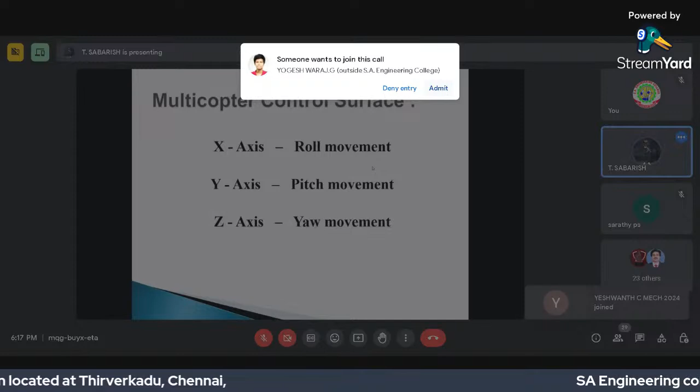Now we are coming to the multi-copter section. Multi-copter surface controls are x-axis which controls the roll movement, y-axis which controls the pitch movement, and z-axis which controls the yaw movement, similar to the UAV.

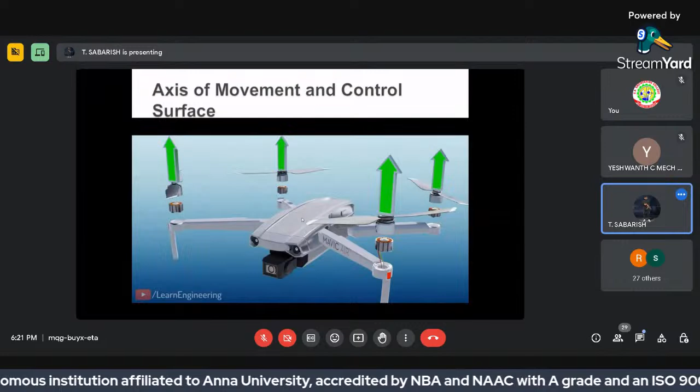Learn about the other two angular motions of the drone: pitch and roll. The pitch and roll of a drone are controlled by the same stick, and they work based on the same physics. To pitch the drone forward, the front propellers are spun at a lower speed and the back propellers at a higher speed. This creates a different lift force at the front and back, producing a net torque that causes the drone to pitch.

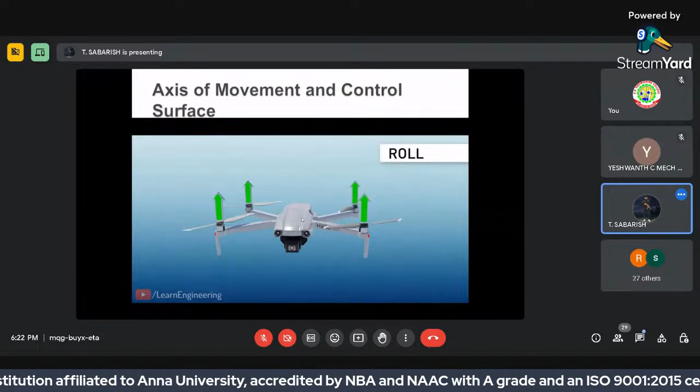To roll the drone, the same trick is applied but to the side pairs. One side pair is spun faster and the other slower, and the net torque forces the drone into a roll motion. Interestingly, in both roll and pitch operations, even though you change propeller speeds, the reaction torques produced by the motors add up to zero. This is the beauty of quadcopter drone design, making way for stable drone operation.

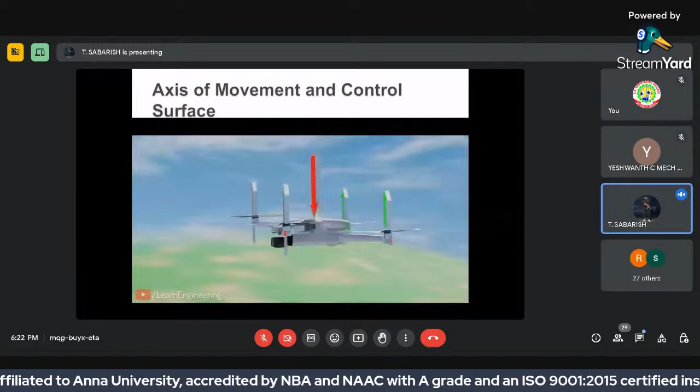Earlier in this video, we saw how to climb a drone. Now let's see how the drone is flown forward or sideward. Assume you are pitching the drone forward. After achieving the desired pitch angle, you bring the propeller speeds back to the same value so it won't pitch further. The question is whether the drone can balance at this tilted angle.

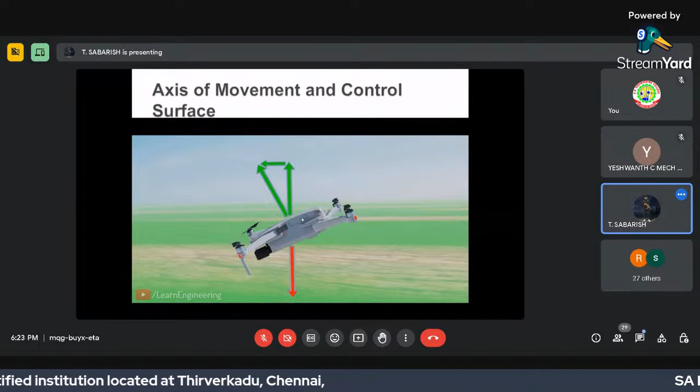The answer is no. To balance the drone, we must first balance the gravitational force. Suppose the propeller speed is such that the vertical component of the propeller force balances the weight. Here comes the issue: the propeller force also has a horizontal component. Even though vertical forces are balanced, the unbalanced horizontal force will move the drone horizontally, causing a drag force on the drone's body. The drone increases its speed horizontally until the drag force matches the horizontal force.

In short, to fly the drone forward, you just pitch it down and balance it vertically — the drone does the rest, automatically moving forward. To get side motion, the same physics is used: roll the drone towards one side and balance it vertically.

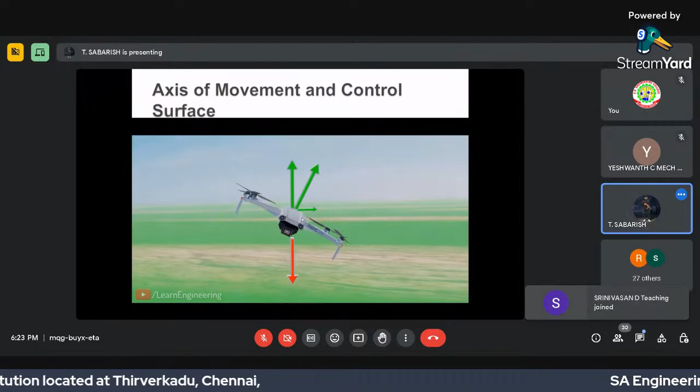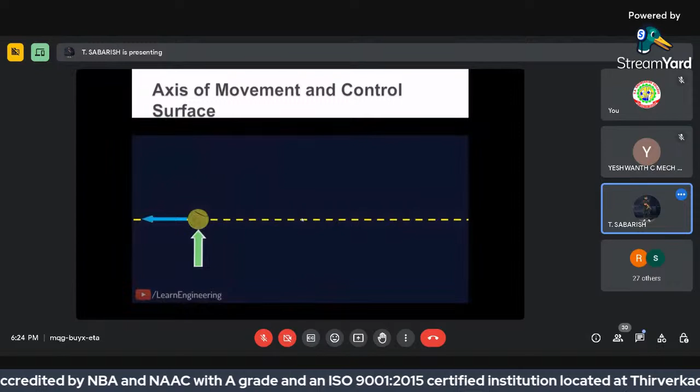So here's a question for you: is it possible to move the drone in a perfect circle? The secret lies in the physics of circular motion. Let's brush up on basic principles. Consider an object moving in a straight line — when acted on by a force that is always perpendicular to its velocity, the object will turn in a circle.

Now you have the answer in mind. For example, you can make the drone move straight by pitching it down. Now, if you roll the drone as well, you can easily produce a force perpendicular to the drone's velocity. This will make the drone turn in a circle.

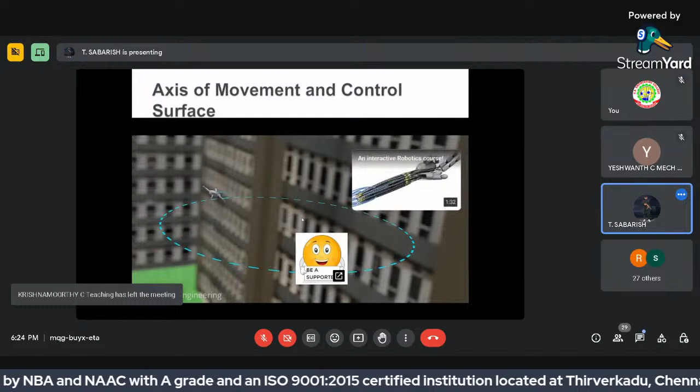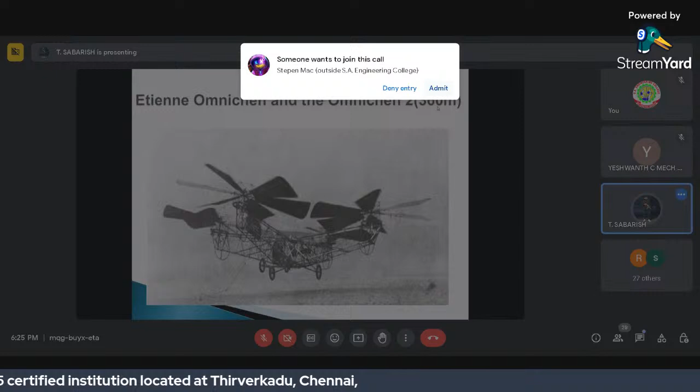Based on various principles, we came to understand how the drone works. There are a lot of differences between a drone and aircraft functions. Aircraft function due to a lift force caused opposite to the air, but in a drone, it produces a lift force to make it fly.

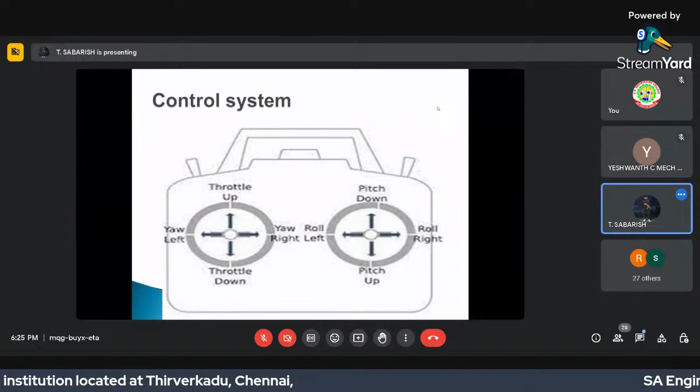This is the control system to control both the aircraft and the drone. We have shown the yaw, roll, pitch and throttle sections. On the left side, upward and downward motion shows throttle up and down, and horizontal motion shows yaw, left and right. On the right side, vertical motion shows pitch up and down, and horizontal motion shows roll, left and right.

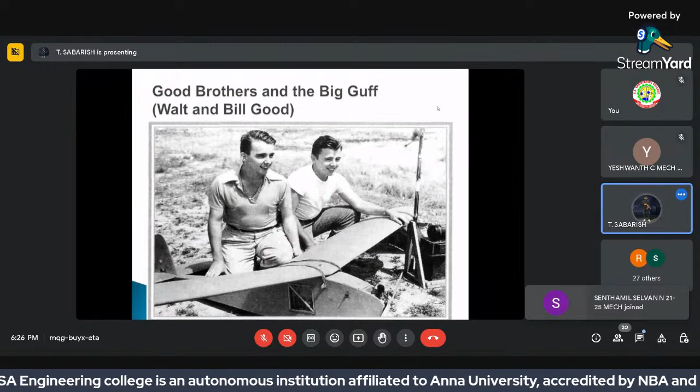These are the two people who created the world's first aerially controlled UAV. They are known as the Good Brothers, their names Walt Good and Bill Good. They created this aerial vehicle with the help of a Yagi antenna, carrying it along to the aircraft by landing from the ground with the help of another person to operate it.

Let's see some basic aerobatics for controlling an aircraft.

We talk about basic aerobatics and more advanced aerobatics for the quadcopter. We're going to start and get in the air. First we'll do a right or left roll, in this direction on the aileron stick. As we roll, we catch with both throttles — follow the roll, then catch with throttle. If I don't do that and keep rolling, it becomes wider, more linear with a lot of sideways action.

Once again: throttle, throttle, and throttle. To do a front flip or back flip is roughly the same thing — add throttle, push forward, and here we go. Add throttle, flip, add throttle. The flip order is pushing forward, letting the stick come back, catching it, flipping the cyclic stick, and adding throttle.

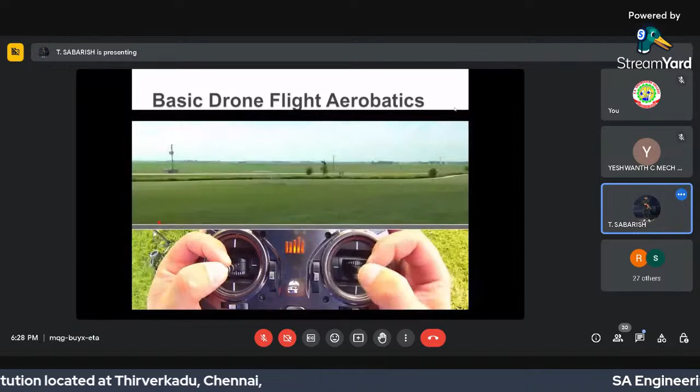Now let's do some advanced stuff and show how to do flips over to the side. Coming toward us, we do a power loop — it takes a bit to do. Add throttle, keep pulling back on the stick, travel over for power back down. We add throttle to gain speed, fall back, and come to the bottom.

That's kind of a short loop, but you can get the idea — that's how you do a basic flip. One more time: adding throttle, pulling over, stop. Now come back here to center.

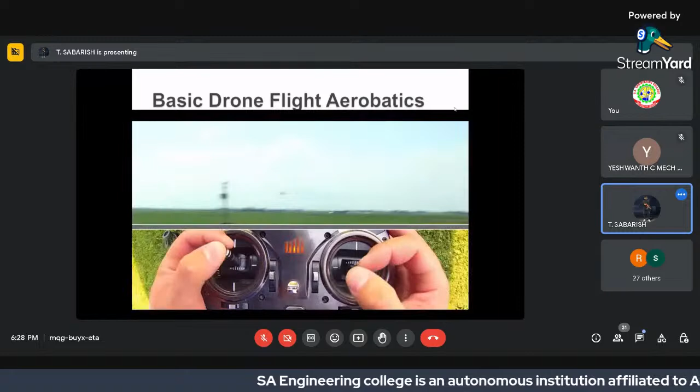Now we're going to string stuff together — fly out and have a good time with some real moves: wheels, right rolls, left flips, traversing flips, pirouetting stuff, far out here.

This is kind of real basic aerobatics — two stall turns, then a pirouette at the bottom. You can see what my hands are doing, just adding slight influence at a time, catching it with throttle. It's not a helicopter, so it doesn't float.

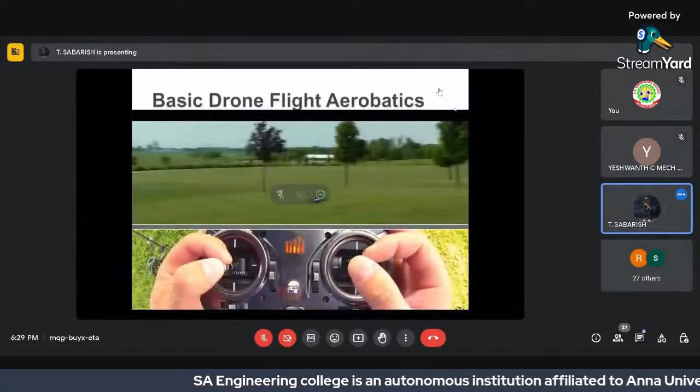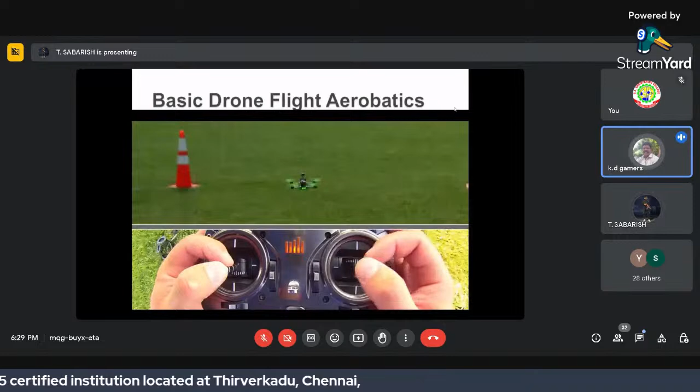These types of aircraft take a lot of practice to control. I'm just following the stick movements of the aircraft. It requires all four sticks — throttle, roll, pitch, and yaw — to control the aircraft simultaneously. Even missing a single stick can cause a crash, so we need all four sticks together, and for better performance we also need a gyroscope.

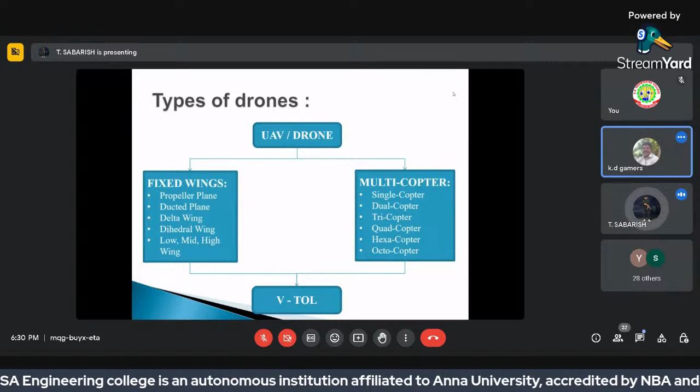Now we're moving to the next section: types of drones. UAV and drones are similar. There are two types: fixed wings and multicopters. In fixed wings we have propeller plane, ducted plane, delta wing, dihedral wing, low, mid, and high wings. In multicopters we have single copter, dual copter, tricopter, quadcopter, hexacopter, and octocopter. There's also VTOL, a hybrid version of fixed wing and multicopter.

Let's move to the first of these topics: fixed wing UAV and drone sections.

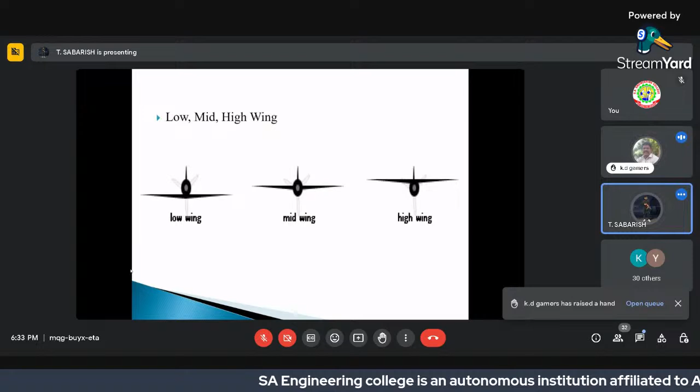These are the low, mid, and high wings - the three types of wings used in every type of aircraft we've seen before. Low wing type aircraft are mostly used in delta wing and racing type paraplanes. Mid wing type airplanes are used for commercial planes and cargo planes. High wing type aircraft are used like buggy planes, cargo planes, and even gliders.

Next we see about the multi-copter, UAV and drone section.

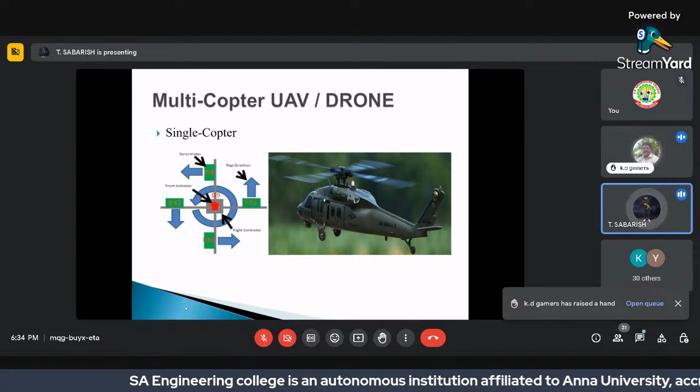The first one is single copter, which we all know as a helicopter. It's a single shaft rotation, but it also has a servo motor connector, based on whether the helicopter has two wings or four wings. If it has four wings, we have a four-control system of servo motors. If it has two wings, we'll have a two-control system of servo motors. While the aircraft propeller is rotating, it does not change any angle in the propeller, but while taking off, the servo motor changes a linear angle in the propeller for giving thrust, and for landing on the track.

The next thing is dual copter. As seen in the video of how the propeller orientation rotates, it is the concept of two wing motors, which we may have seen in a movie, rotating clockwise and counterclockwise. It has less efficiency and less power lifting capability, so these drones are not used commercially - it's just a concept, or maybe an RC model.

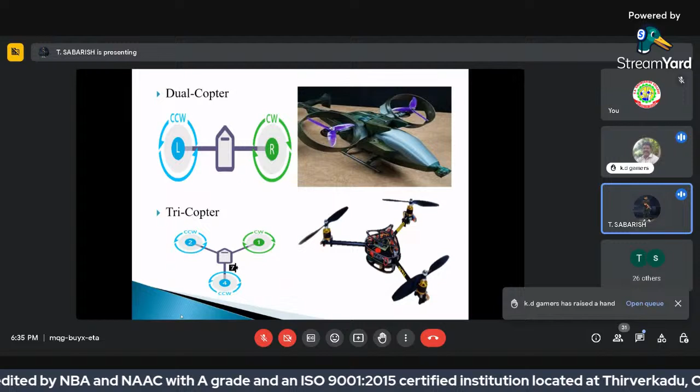And tricopters. Tricopters are exactly as the name implies - three blades in a Y direction. The left side corner and bottom corner rotate in a counterclockwise direction, and the right side rotates clockwise. The backward motor can either rotate clockwise or anti-clockwise, but it's attached with a servo motor, which functions exactly like a helicopter's tail rotor, changing left or right to turn the yaw direction of the drone.

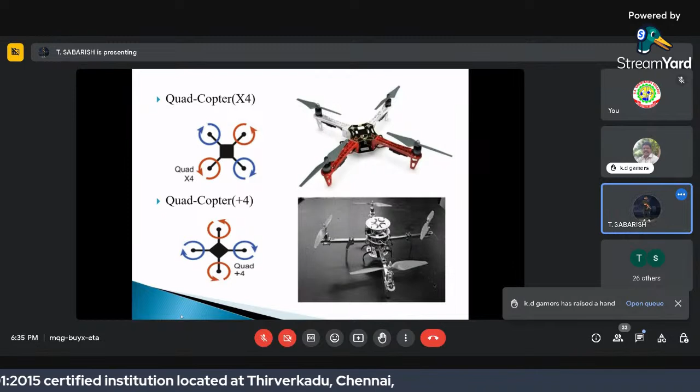Quadcopter has two types: X4 quadcopter type and plus 4 quadcopter type. X4 quadcopter is the most common type we've ever seen, forming an X direction with forward two motors and backward two motors. But in a plus type quadcopter, there's a single motor for forward, single motor for backward, single motor for left, and single for right. We can see the motor orientation in the left side diagram.

Next is the hexacopter. This also has two types: X hexacopter and Y6 hexacopter. Hexacopter has six motors, which acts as a basic drone model. Meanwhile, the Y6 hexacopter is an upgraded version of a tricopter with two motors - one on top and another upside down. The propeller will be faced clockwise and the downside motor will be anti-clockwise to create perfect thrust. These models are designed to be compact while producing more thrust and more lifting capacity.

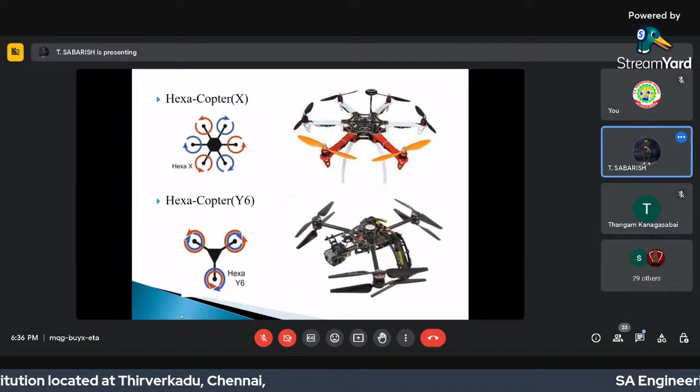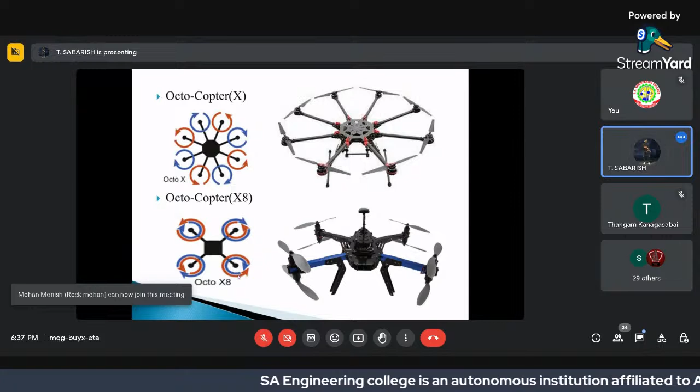The main reason for inventing this aircraft is that a quadcopter with 4 motors consumes more power for takeoff and traveling, while a single rotor aircraft consumes less power and covers a longer range. By combining this quadcopter and aircraft, it can travel more efficiently and take off vertically, so it doesn't need any runway. With the power of a vertical engine, it can travel a long distance to cover a long range.

The future applications of drones are aerial photography for journalism and films, shipping and delivery, and even space research. But for space research, we need a small modification, using either a jet engine or small gases which produce a little thrust.

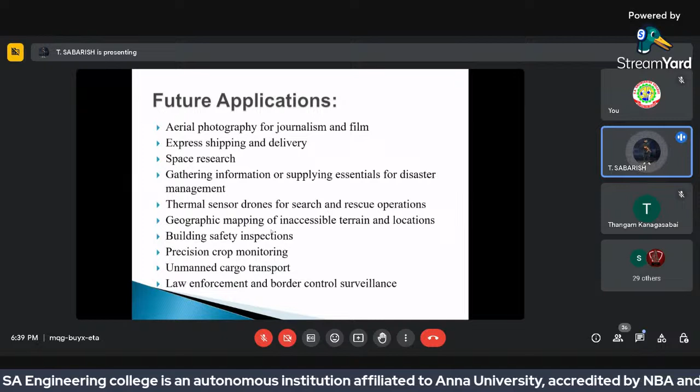This is the main purpose drones were invented for, and this is the current trend in the market, also known as aerial mapping. The main purpose of this is to 3D scan a whole field to create a 3D virtual model, which can be used for various purposes like building industries, etc.

Precision crop monitoring can also be used in agriculture for crop monitoring using artificial intelligence, and also virtual reality based. Even drones are used for unmanned cargo transport. Since drones are efficient at lifting weights, they can be used for deliveries and cargo shipments.

The drone rules in India: don't fly a drone more than 400 feet from ground level. The reason for this rule is that commercial aircraft and helicopters fly above 400 feet at a basic level. To avoid crash damage from commercial aircraft or helicopters, the rule has been made to fly below 400 feet.

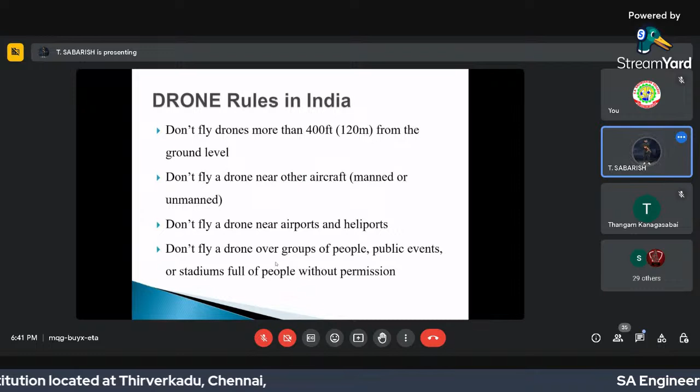Another reason drones should not fly near an airport or in a no-drone zone is because the drone has a 2.4 GHz transmitter which interferes with aircraft signals. Also, the drone has a very sharp propeller and high motor rotation speed, so it should not be operated in a public place or even stadiums, etc., because it can cause damage.

Drone pilot: for becoming a drone pilot in India, the Civil Aviation Ministry has announced anyone can be a drone pilot for various applications in the market, for commercial and non-commercial users. Above the age of 18, with a 10th pass certificate, you can join an institution and get a DGCA certificate and medical checkup to become a drone pilot.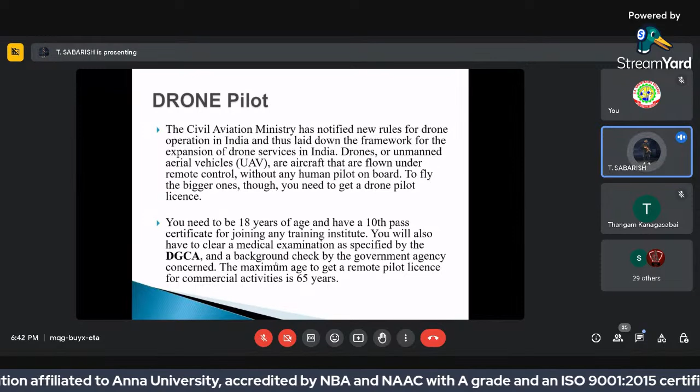With training, you can also be a commercial pilot up to the age of 65, with a little more courses and training.

These are the five categories of drones allowed in India. Nano category: less than 250 grams. This nano category does not require any license or pilot license to fly in any place, but the limit is to fly under 120 feet.

Next, the micro category: drones above 250 grams and less than 2 kg. These types of drones are used for research purposes and projects.

Third is small: drones above 2 kg and less than 25 kg. These types are used for industrial purposes like aerial mapping, surveillance, etc.

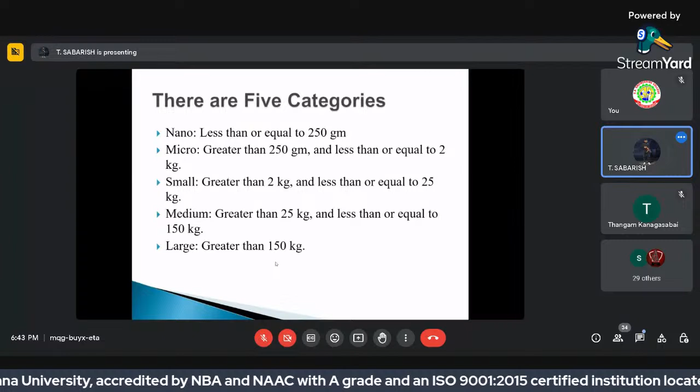Medium: drones above 25 kg and up to 150 kg. These types are used as unmanned aerial vehicles for long range surveillance, etc.

Fifth, large: these types of drones are above 150 kg, used for cargo shipment and delivery, etc.

Next, drone making. For making a drone, it requires a few basic equipments, the first one being the BLDC motor, known as a brushless DC motor, which we have seen in the video.

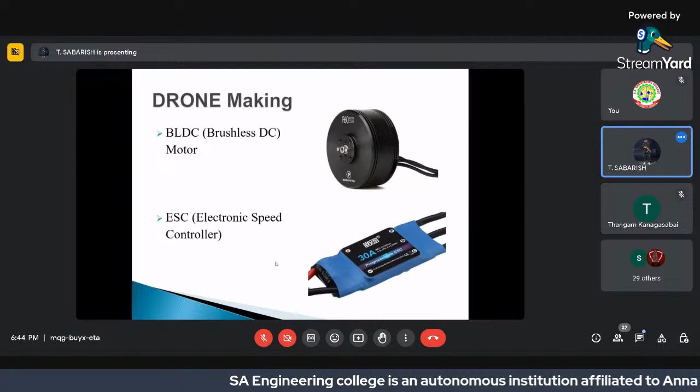The electronic speed controller converts a minimum amount of DC voltage to a three-phase induction motor AC voltage to run the BLDC motor, and also transfers the signal to the transmitter and receiver system to control the motor.

Next, the flight controller. The flight controller is one of the main components, also known as the motherboard of the UAV as well as the drone. For controlling the aircraft and maintaining stability in the air, it's needed because it has an inbuilt gyroscope with PID tuning programmed in, which can also be customized. By adding a GPS module and a telemetry module, it can also become an autonomous drone for various purposes.

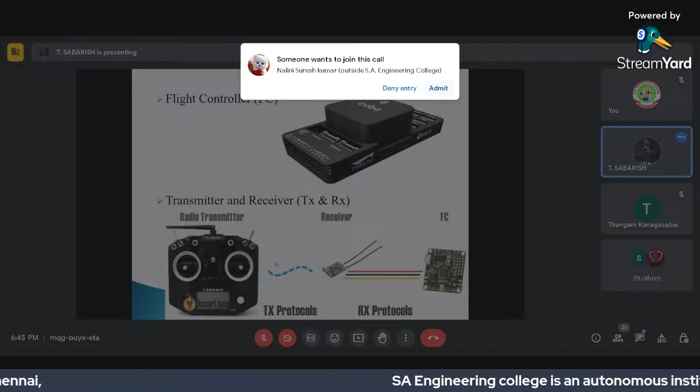Next, the transmitter and receiver. The usual type of transmitter and receiver used in toy cars are used in this field, because these produce a 2.4 GHz transmission system from transmitter to receiver and don't require any intermediate device to connect. These receivers absorb the command function from the transmitter and pass the instruction to the flight controller, through which the drone's operation is carried out.

The battery can be customized for a minimum and maximum weight the drone can carry, and the flight time can also be customized by increasing or decreasing the mAh of the battery.

Based on the drone size, the size of the propeller can also be changed. The basic type of propeller can give a thrust of 4.5 inches of thrust in a single revolution. But considering two-wing, three-wing, and four-wing type propellers, these can be customized according to the purpose of the drone we're building.

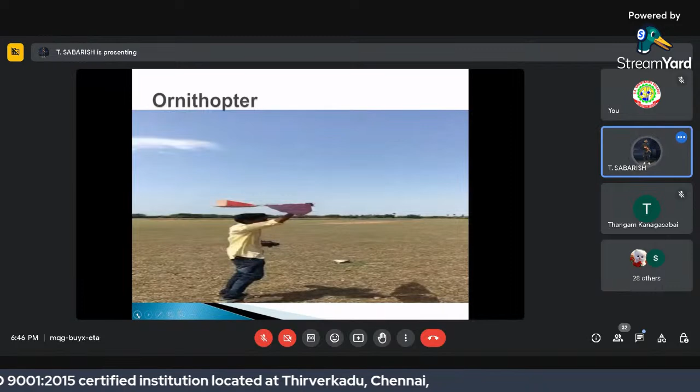These type of drones are known as ornithopters, which are not drones, not aircraft. It flies exactly like a bird.

It doesn't have any propeller-powered engine. It's just flying with the help of the flaps.

This video doesn't seem very clear, but I just had this video. You can see the movement of the wings, which really looks like an exact real bird.

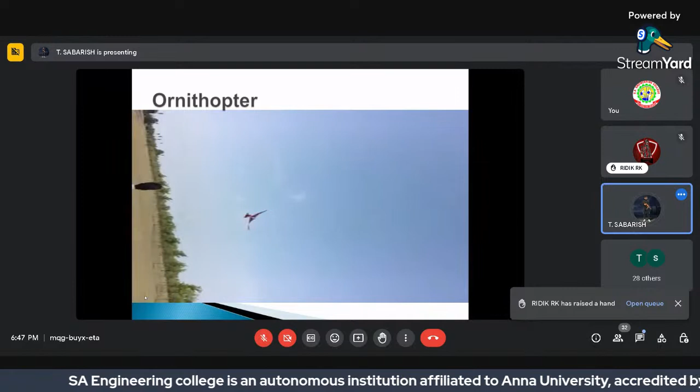Even the roll, pitch, and yaw direction can also be controlled in this ornithopter.

And this is one of the successful ornithopters built in India.

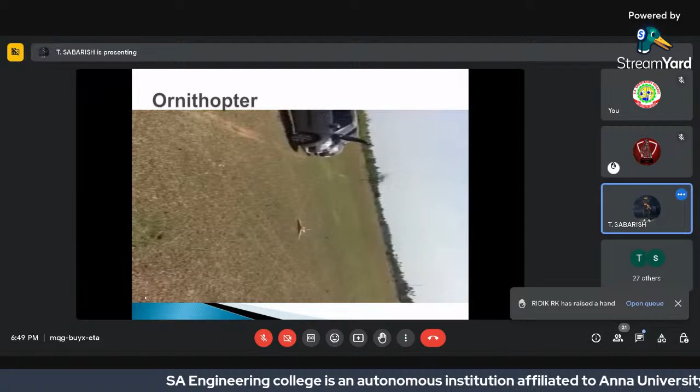Actually, I have one question. I have a question. Ask me. Increase or decrease battery mAh? Yeah.

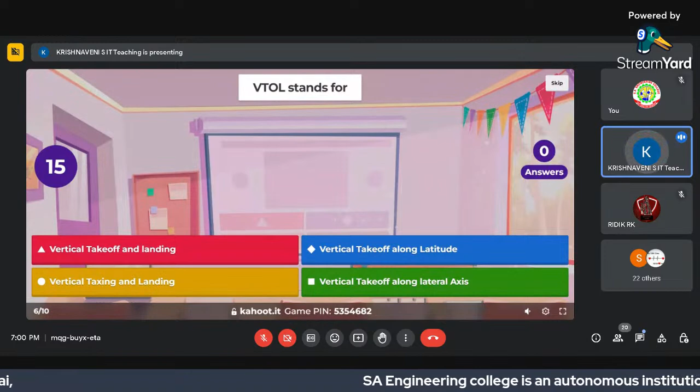VTOL stands for: vertical takeoff and landing, vertical takeoff along latitude, vertical taxiing and landing, or vertical takeoff along lateral axis. 3 members gave the right answer. This is vertical takeoff and landing. So now time for the scoreboard: Kavya with 2772 points. Good, now move to the next question.

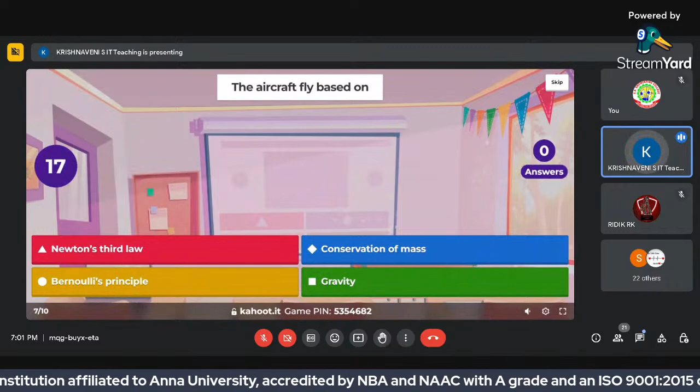Question number 7. The aircraft fly based on: Newton's third law, conservation of mass, Bernoulli's principle, or gravity. Time's up. No right answers this time. The right answer is Bernoulli's principle. Scoreboard: Kavya with 2772 points. So move to the eighth question.

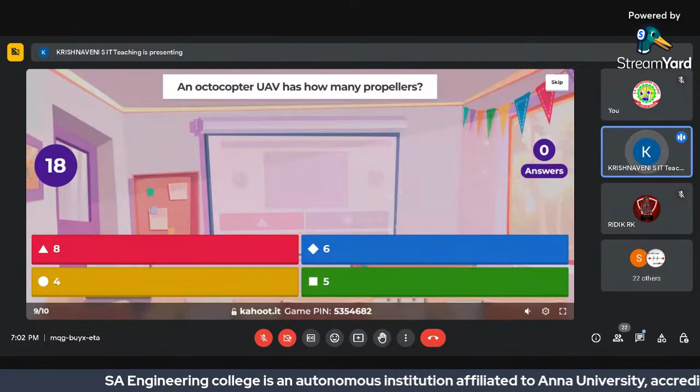An octocopter UAV has how many propellers? Options: 8, 6, 4, 5. 5 members gave the right answer. The answer is 8. So now move to the scoreboard. Kavya with 3300 points. So we move to the last question.